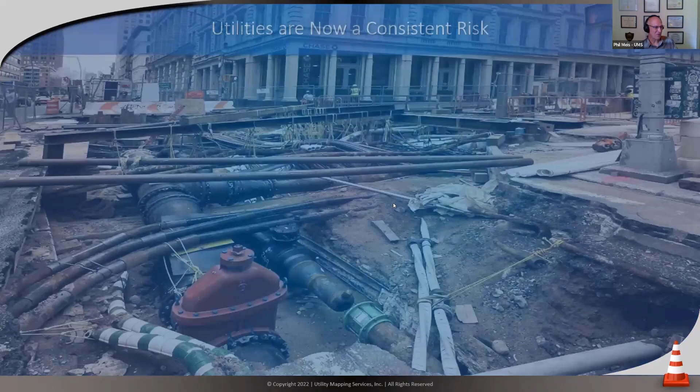Dan will kind of touch a little bit, I think, on some strategic life cycle management strategies that are being implemented at Montana, Texas, and in Iowa right now. We're working with Iowa DOT on a project to basically outline what they need to do in the DOT. So again, there's a lot of parallel efforts going on here. I'm going to just roll down here because we know about the problems.

So we've got these two standards here that we'll cover. And again, this standard 38, and actually we just got a cover - this isn't how the cover is going to look, that was actually from the old cover. We got the new one drafted, was shot to us on Monday, so I didn't have time to put that in here.

But this standard's for existing utilities, as I mentioned. It basically resolves the issue of poor records in the past. We didn't have standards for records, so some records are very good and some aren't, and it's just you don't know what you're going to get, and a lot of times there's a mix out there.

So this kind of addresses that problem, and then this is to kind of get things straightened out. Now, interestingly, this standard ASCE 75 stemmed from the Canadian standard CSA S250, and we had 3 members from the Canadian standard committee on our committee to help us develop this standard. They've since taken our drafts, and I think there's going to be kind of a merging of the two, but we started with theirs. One of the things they said was, hey, we wish we would have made it 3D, we wish we would have made it digital, and we wish we would have included the above ground infrastructure as well as the underground. So that's what we did in ASCE 75 to make sure it addressed all that.

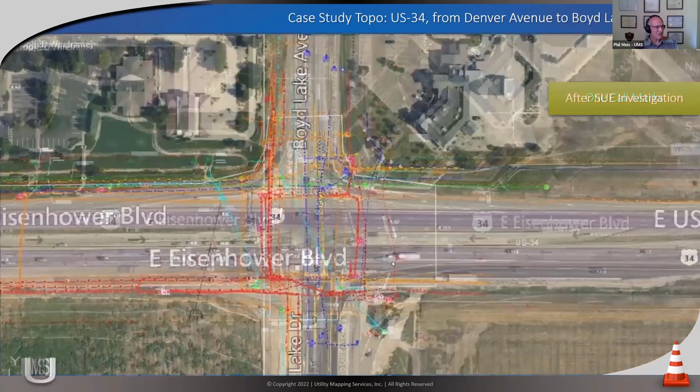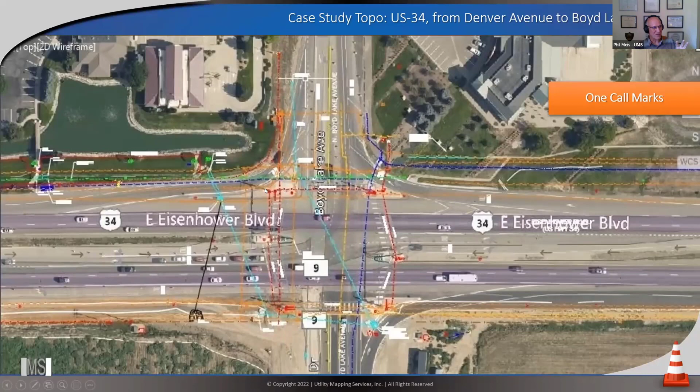I didn't want to stick on that—I wanted to show you some examples of 38. Here's one from Colorado. Before, this would've been a typical records compilation, topo survey, and information going to design. This is after a 38 investigation.

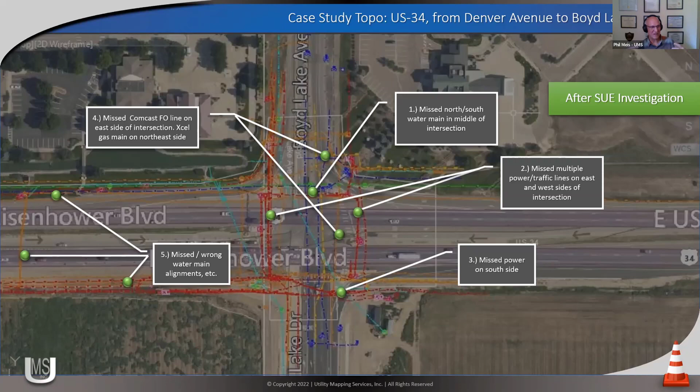There's a lot of things involved—we've got a lot of examples of that. It's a much more lengthy process to develop, but it's the old 'measure twice, cut once' thing. If we spend a lot of time getting the data right, in a standardized format, using a lot of different tools and some of these modern technologies...

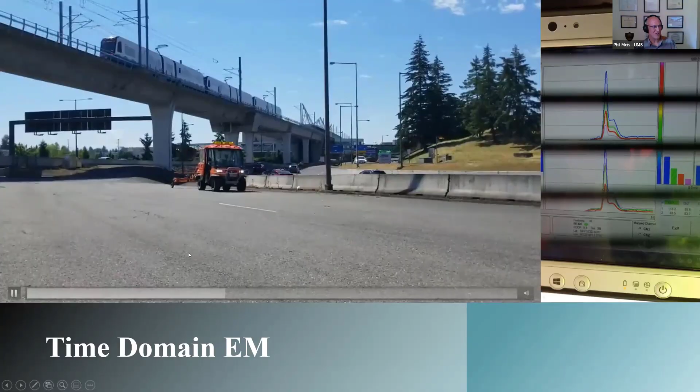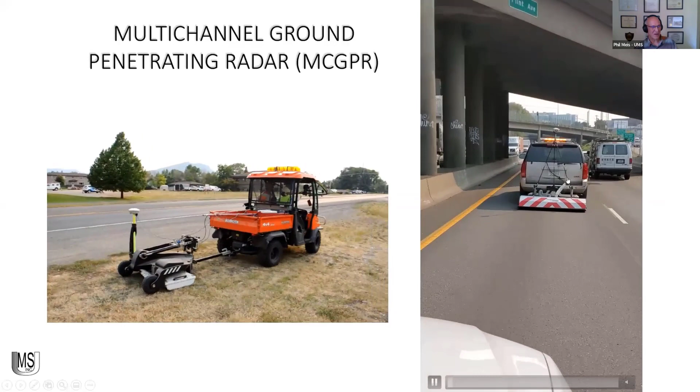This is time domain EM—just showing some examples of the data. Again, I can't dwell on it here. Multi-channel radar systems are coming out too—this is state-of-the-art stuff. We can drive at road speeds and get tremendous scans of the data and the subgrade.

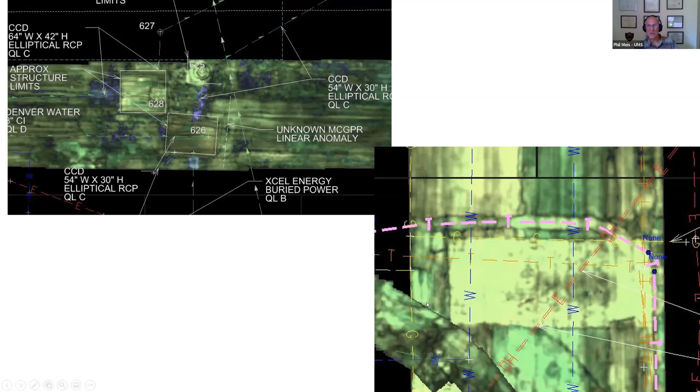These are all just tools we use to stitch this disparate data together, along with professional judgment, analytics, and understanding how these infrastructure systems are designed and built, and the history of how areas evolved and where things are abandoned—bringing all this information together to develop a 3D model that can be used with confidence for design work, like what WSB did on the project Bart mentioned.

This is showing some of the multi-channel radar stuff. Again, these are just tools—they work well in some scenarios, won't see everything, but they do see other things. What we're finding with these tools is a lot of stuff that people didn't even know was out there.

Phil, can I ask you a quick question? I'm seeing symbology here—is there some standard for symbology?

Symbology? Yeah, for instance you've got solid lines and dashed lines and lines with dots in the middle of them. And this one? Yeah, I mean it's kind of all over the place. These are typically what we're seeing here are CAD standards.

This would be Colorado CDOT CAD standards. Hey Phil, I can touch on that too. Yeah, you're exactly right, it's all over the place. But a lot of the DOTs have their own CAD standards and they require it to be a certain way, so it changes from DOT to different agencies we're working with. But yeah, I would tend to agree with you 100% that it's all over the place. But they know their symbology, so for us to change it on them wouldn't go over too well. But yeah, it's a good point.

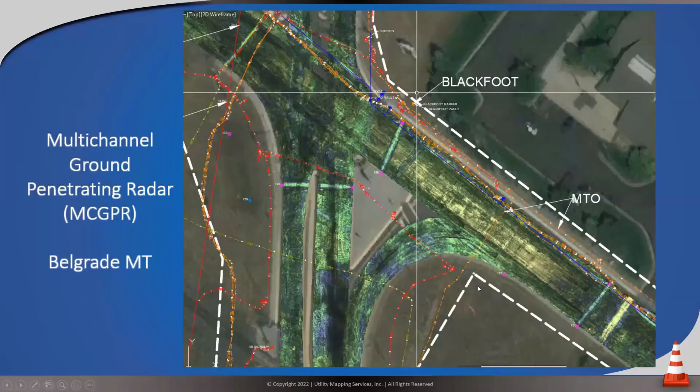And there is an effort as we move into 3D. I think you're going to see us departing from this 2D world and going into 3D very soon, or it's happening right now. There's an effort right now—I think there's a research project funded for NCHRP, isn't it Dan—looking at how to depict these things in a standard way in 3D. Yeah, it's going to be a lot more visually appealing, let me put it that way.

Okay, thank you, I appreciate that. So that kind of helps us—we're working through the same issue right now on how to depict the difference between a locate and a line that has been submitted by a utility.

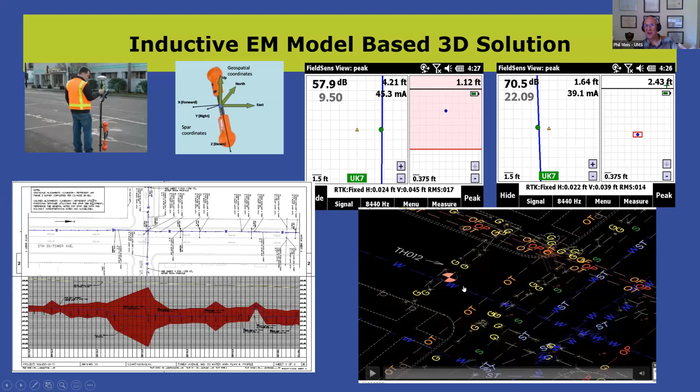So, okay, thank you. Yeah, I think the way ASCE manages it, it's in the data behind the depiction. So you can manage that in a lot of different ways. You can have it embedded so that when you hover over the line, that information's available. That's how you assess how good it is and where it came from, all that. So that's very important to understand when you're looking at it. But you don't want to clutter up your drawing either when you're doing design work, so text leaders aren't a good way.

I'm sorry, one last thing—what was the name of the entity that's working on trying to come up with some standards? I'll have to look into that and find out. I want to say it was an NCHRP research effort. I could ask, I'll check with Jim Anspach, I talked to him earlier. All right, thank you very much.

You bet. So let's, I mean, ASCE 38, by the way, I'm just going to go back here and just touch on it. What we're doing is we're collecting so much different data now that we have to manage it in a more data-centric environment and stitch it together to create something that's consumable for the design effort. And then also beyond that, for augmented reality, for machine guidance, for BIM—there's just a lot of different uses.

But what we're doing is we're managing all the data behind it, like I was saying. So it's not just the CAD file, it's more of a data-centric approach, and it's got to be staged in a way where it's treated like a work in progress, because you're going to get more data as you go along and things change. You're going to have test hole results, you're going to have excavations that expose things, you're going to have old records that show up and new installations that are put in. It's always changing, so you need to have it in an environment you can manage, and then produce CAD.

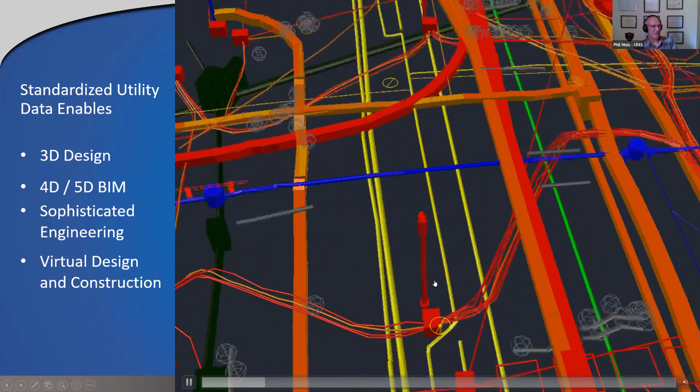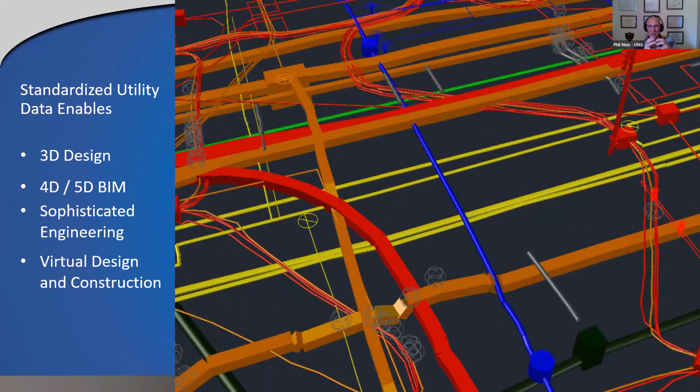But there's your 3D depictions here, and what we're doing right now is every point along here that was used to develop this is based on 2D information from one source and a third dimension that might be from electromagnetics or radar, or it might be an as-built, or it might be a test hole. So we're managing those different data sets, merging them together to make this what you're seeing here. This is what we use to do the design, to do the BIM, and a picture tells a thousand words.

This is where the 3D is so much more appealing than the 2D, because you can understand it. One of the things ASCE 38-22 requires is not only the alignment of it and how you got it, but the space that this thing is occupying. So if you have a vault, if you have different sized pipes, you want to represent the full geometry in 3D and have that as part of your data set.

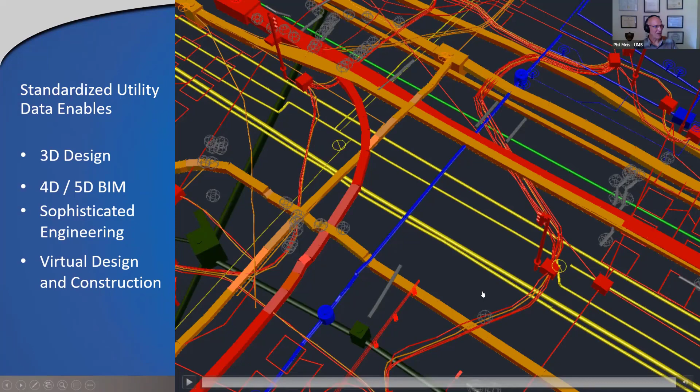Let's see, I'm rushing through here. This is just showing some of the value.

I think I've shown this before, but the value you can achieve by having this kind of information going into the project is significant. If the designers have this information, construction goes a lot faster and a lot safer, and it doesn't supersede the damage prevention effort. That still has to happen, but the design has already been set up to mitigate the risk, so we know where we're going to be tight and where we have to be careful ahead of time.

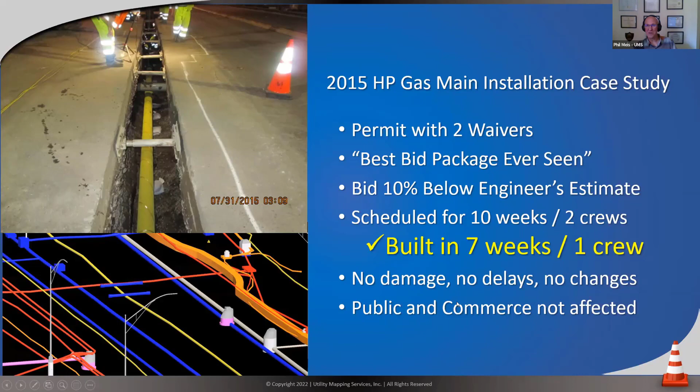The big kicker behind these processes is what we call critical path analytics. If we can reduce the critical path for the project and deliver it faster and safer, that's where your pay dirt is. That pays for all the effort up front. The example WSB has done really brings that out. That was one of our examples from 6-7 years ago, I guess.

So when we get to ASCE 38, there's a lot of things that are the same. We still have the 4 quality levels. We still have engineering tasks that have to be done, value studies - that's been moved to the appendix. The geophysical methods are still present.

But what's different? Well, it's got performance goals now. There's a lot of commentary in there to help clarify the usage of the standard, because a lot of people are taking records and calling it quality level D and saying, hey, we met the standards. Well, no - so there's been a lot of clarifications of misinterpretations. The goal of ASCE 38 is to try to get everything to at least level B, and then A where you need it. B is, rule of thumb, going to be about that kind of accurate.

You can't say it's accurate because you're using remote sensing methods. It's not like survey where you can directly shoot it and get a survey shot - you're using geophysical methods to develop an interpretation of what's there and where it is. So there's a lot of professional judgment that goes into the depiction. We just can't get the data to produce a statistical accuracy like you can with survey, but you can have accuracy for the survey shot that's done on the paint, and that's called out in here.

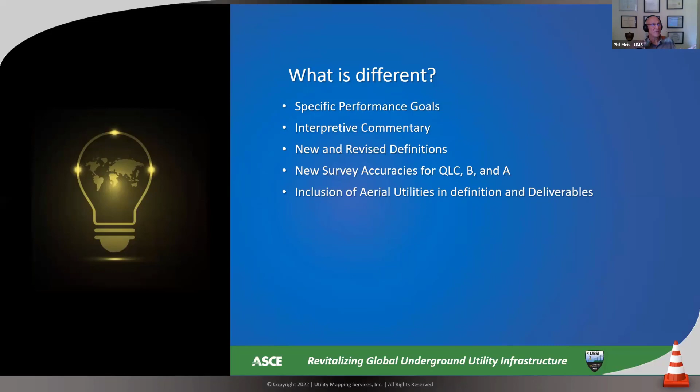And then we include aerial, so it's no longer a standard guideline for the collection and depiction of subsurface utility data, but a standard guideline for the investigation and documentation of existing utilities. That's the new title on it. So it includes both above ground and underground.

Another thing about 38 is, like I mentioned, you want to get the geometry. It's not just a manhole lid - you want to know the space that whole structure is occupying under the ground. So you're going to want to go down and use LiDAR methods or other methods to document that and get that represented.

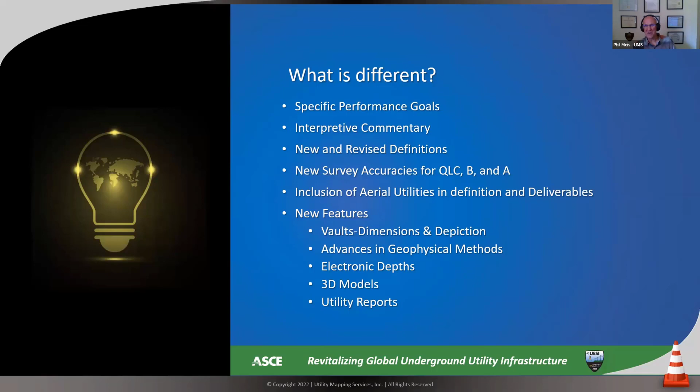They also talk about the advanced geophysical methods I just showed earlier, electronic depths, how to use that. 38 originally stayed away from depth data because that was back 20 years ago - it was pretty much guesswork using electronics. Now you get metadata that looks at the circularity of that magnetic field, and it can tell you if you've got a good circular field or if it's being distorted, and how well you can trust that information. So that metadata is being recorded now, and electronic depths are actually much better.

It's a prescriptive standard and a performance standard. I think that's a big deal for the professional - that was to help get the wannabes out there who are doing different things and not getting the idea that there's a lot of liability associated with it. You want the statutes that regulate professional engineering to kick in for this product - this is an engineering product. That professional has to have a quality management program and a lot of documentation to back up that you did what you said you were going to do, because you could wind up in a court of law if something happens.

No additional information is prudent. Doing the critical path analytics is important, as I mentioned. You want to try to come up with projects that are constructible before you even let the job. A lot of times we can avoid things in design and come up with more sophisticated solutions rather than just relocating the utilities, which is probably the lowest tech solution - moving that utility out of the way.

It's like, well, you can't do that, especially in urban environments. Where are you going to put it? When are you going to put it? How much delay is it going to have? You can't shut that gas line down - then how are they going to maintain their services? If we know where the stuff is, and we know what it is, and we have a lot more information about it in 3D, we can actually come up with designs that protect it in place quite often.

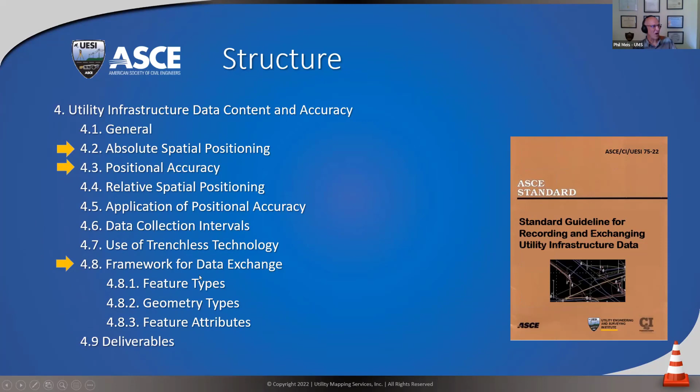At the end of the day, I can't focus on much, but I'm just going to stick to some key things you can walk away with. One is we wanted to use a common spatial datum, so we're using our national spatial referencing system. Everything you collect needs to be tied to that. I came from NOAA 30 years ago, and we were doing this for nautical charts. Most federal agencies, all the DoD activities, are all tied to the National Spatial Referencing System. That's what happens when you turn on your GPS or GNSS system, you're tied into that. So it's easy to achieve.

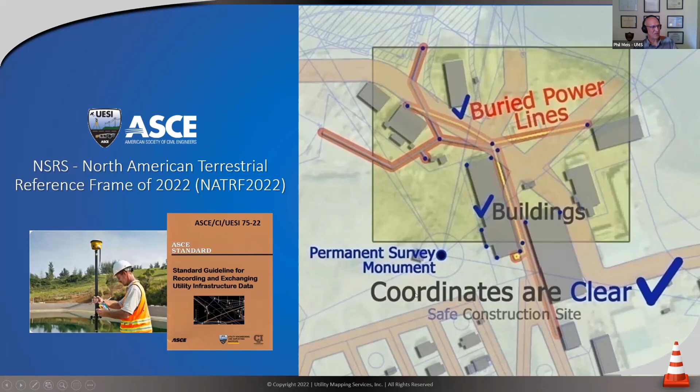Instead of an accurate or quality level, we have an accuracy level. This parallels the Canadian CSA S250 standard—there's a slight difference between their table and ours, but basically it's the same. So when an agency issues a permit to a utility, they say, we want you to document this using accuracy level 3 for this area, we think that's good enough. They might say level 3 for horizontal and 4 for vertical, or maybe 5, whatever.

It's a very scalable standard. You can tighten it up to where you have a certificate of survey, or it can be as loose as using your phone to get GPS coordinates, and we'll qualify it. That data will be qualified so going forward it'll all be standardized in a consistent format we can bring into design, so we don't have all these different formats all over the place. We'll also have the metadata, so we know how good that data is.

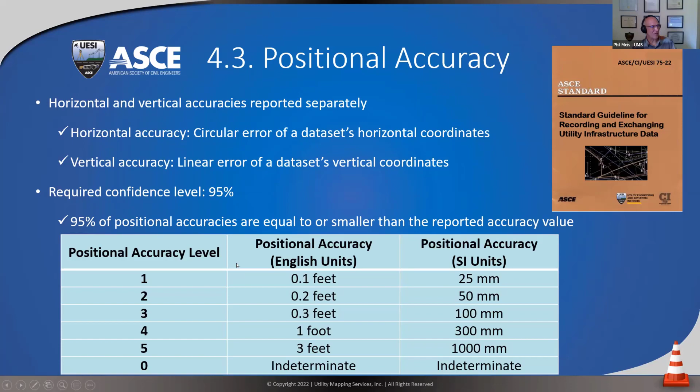The standard was set up to be scalable. If you had to deviate—say you're doing accuracy level 3 and couldn't achieve it—it degrades to level 0 or whatever. It's all there; this is just a general rule of thumb to achieve accuracy level 2 or 3. It's not that hard, again, with the technologies out there, like LiDAR and drilling tips on HDD. HDD is handled a little differently—you can get accurate shots at the test pits and bore pits, but in between, you fall back to ASCE 38.

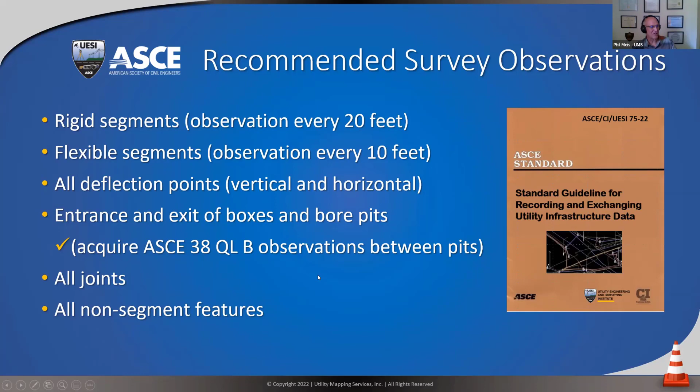These two standards, ASCE 38 and 75, are parallel, sister standards. 75 was written to accommodate the 38 data. You may not get all the data fields populated, but all the 38 information can flow into a 75 format and be shared accordingly. But for directional drilling and remote sensing—using inertial navigation or electromagnetic methods to get that bore tip—that's considered quality level B data. It would still be managed the same way, but qualified as level B, so it won't have an accuracy level, or if it does, it'll be indeterminate.

That's changing too, because as the technology gets better, we can actually start saying it's that accurate. The other thing is the data gets reduced to the center of the geometry you're managing. So if all your shots are on the top center of the pipe, what gets reduced and shared is that center line for the feature.

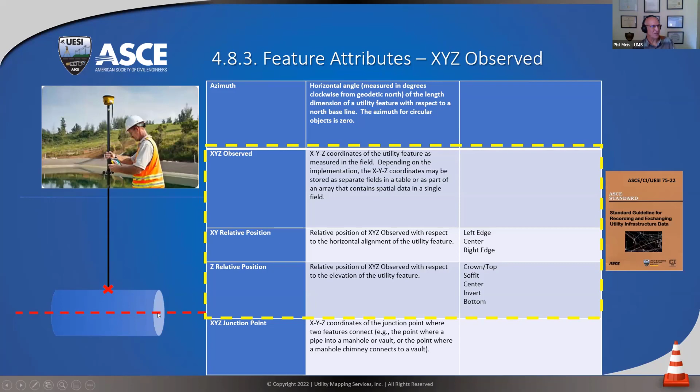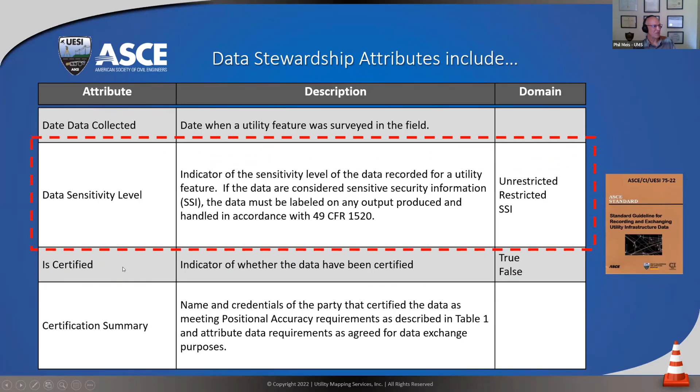We also address data sensitivity—we fall back and use 49 CFR 1520, which outlines very well how to manage sensitive, secure information. There's also certification, but I'm not going to touch on this. This just covers some of the required, mandatory, minimum, optional, and conditional attributes, and there are tables behind this, so it's easy.

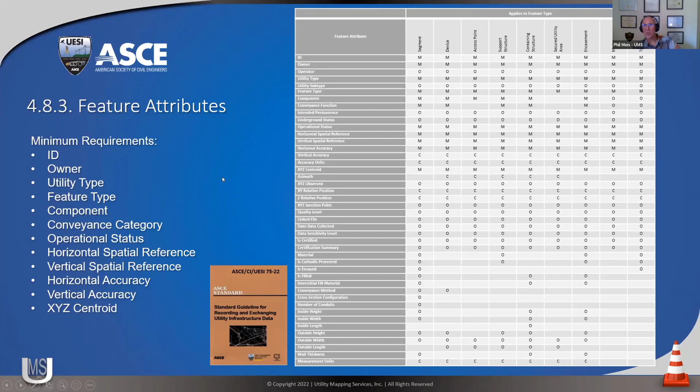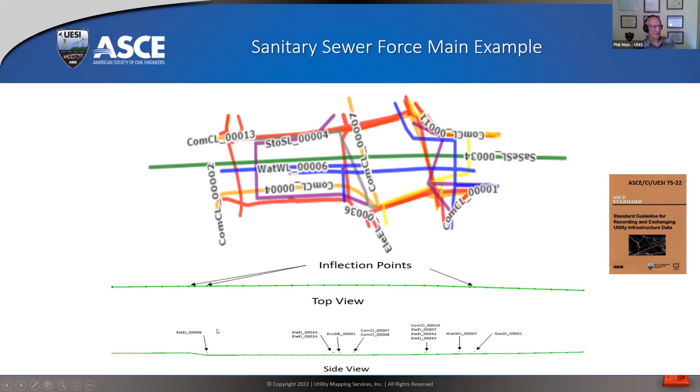This is just a quick example using a sewer pipe. One thing the standard recommends, when it's being administered, is not only get shots on the facility being installed, but anything crossing it—go ahead and get shots on that too and submit it. We may not know what it is, but it doesn't get any better than that. If you've got something exposed that's crossing, get a shot on it and submit it, and that information will be managed going forward.

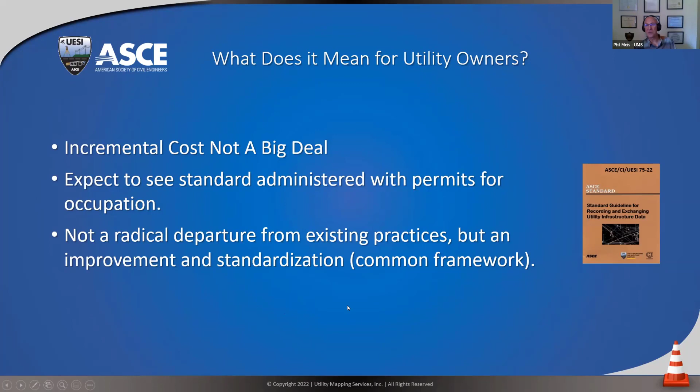Again, we want to enable augmented reality—not a big deal cost-wise. This standard has already been implemented in Montana for new infrastructure for two years now, with all their utility permits going in the DOT right-of-way. The reception's been fine, it's been good—the utilities get it, they love it. We were actually able to implement a very good, friendly permitting system with it.

The benefits achieved greatly dwarf the cost. One benefit: whenever utilities do a pipeline job or new install, they have to go through the same process as DOT does with design, so they get to start sharing and having that information ahead of time.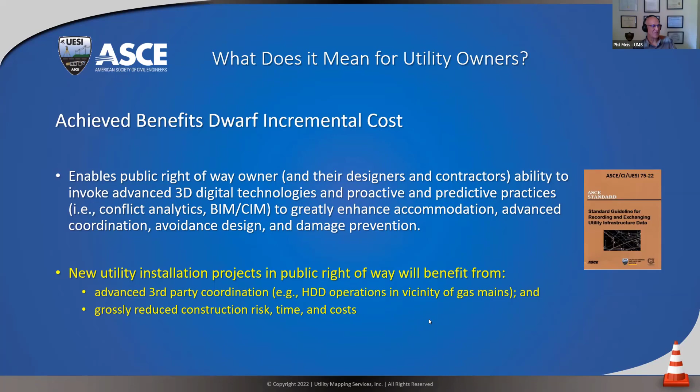That's what Montana's doing, so I think I'm done here. I'm going to stop—this is probably a good transition point. As I mentioned, the OGC MUDDI standard has adopted both 38 and 75 as input, so that's an important thing to keep a finger on.

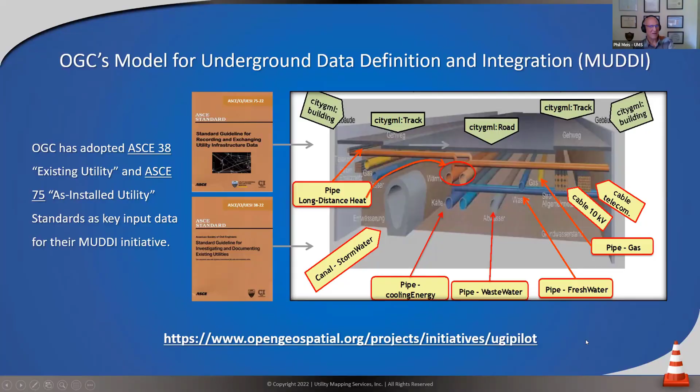So I don't know how I did on time. Yeah, I was going to ask that—how much time do we have? If we don't have a whole lot of time, I can just kind of iterate on things instead.

Could you just go back to that slide 55 with the return on investment? Yeah, you bet, just real quick. And then we've got some more time.

Okay, let me see here. This is kind of an old report. There have been about 5 historic reports done over the years to document this. I think this Purdue study is the one that's quoted the most for using ASCE 38, and this is a return on investment for using ASCE 38.

There's an NCHRP report published last year. We worked with Iowa State and Roy Sturgill, and extended from what the return on investment was from 38 investigations to what ASCE 75 data would bring about. This is pretty conservative - I think it's actually more than this, but 10 times the return on investment for SUE. So we know there's a positive return on investment for using ASCE 38, and if you start using 75 to document when stuff goes in the ground, it's roughly 10 times that. So that's a no-brainer.

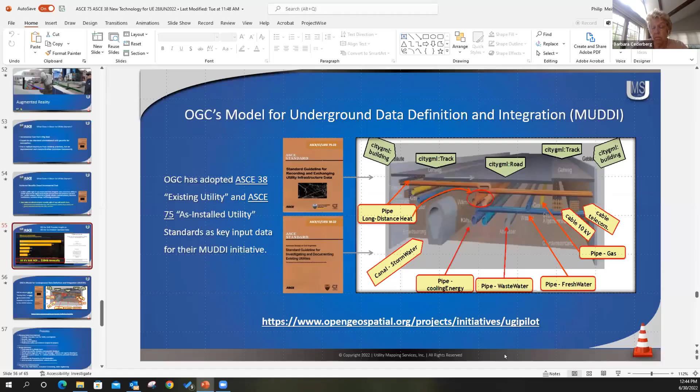Thank you. You bet. So Phil, I can go ahead and just run through. Do you want me to jump down to the slides down here? Hey Phil, while you're doing that, quick question for you.

Could you talk to the issue of the availability of these documents? They're going to be issued at the end of July, is that correct? Yeah, July 25th, just prior to the Pipelines Conference in Indianapolis, the standards will be published. And the question I would have is, to what extent are they available to the public in general - do you have to be a member of such and such? I think you get a little discount if you're a member of ASCE, but no, they're publicly available, anybody can get their hands on it.

So what's the price? I think that was being discussed - I heard numbers like $70 or something like that. Okay, so it isn't - I've seen some instances like the SAE standards where you're paying $600-800 before you have your hands on it, so it might not be a big deal. I think they're talking about actually doing a package deal, you get the 38 and 75 together, and then you get a webinar with it too.

You bet. Dan, did you want me to touch on this?

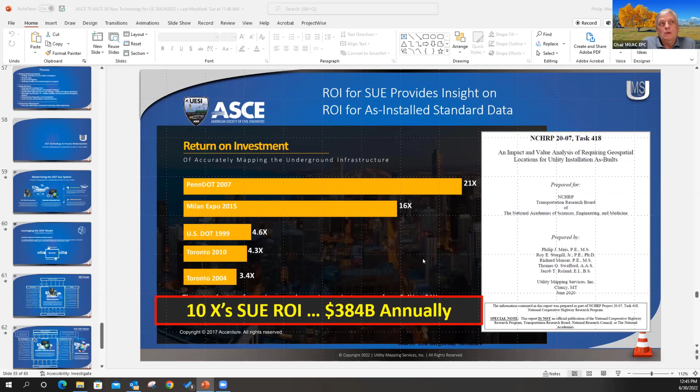Yeah, depending on time, I can walk through with the group what we're doing with the DOTs, and especially how those standards are being applied, so we can put the pieces of the puzzle together. Within the DOTs, we're dealing with their permitting application side, and Phil kind of touched on that. But we're also dealing with the DOT utility data repository - this is where we're capturing all the information, as utilities apply for a permit to put their lines in the right of way. In some states like Colorado and others, but right now we're working with Montana, Texas, and Iowa.

Phil mentioned it's an opportune time to start capturing some of this ASCE 75 data, because number one, they have the design plans they're getting ready to submit to get approval for a permit to put their facilities in the right of way. Secondly, when they do install those pipelines, they can actually capture the ASCE 75 data and get that information directly into the utility repository.

The stakeholder collaboration portal allows the ability for utility members and other stakeholders - could be 811, the one call, other state agencies - to be able to collaborate and share data, but where all the data sits in their system of record. There's a lot of sensitivity around utility data, as we probably all know, so a lot of times they don't want to replicate that data or even submit it to the DOT repository, but they will share it through a collaboration portal for a project purpose, to minimize risk to their facilities. So you can go ahead and flip through this really quickly.

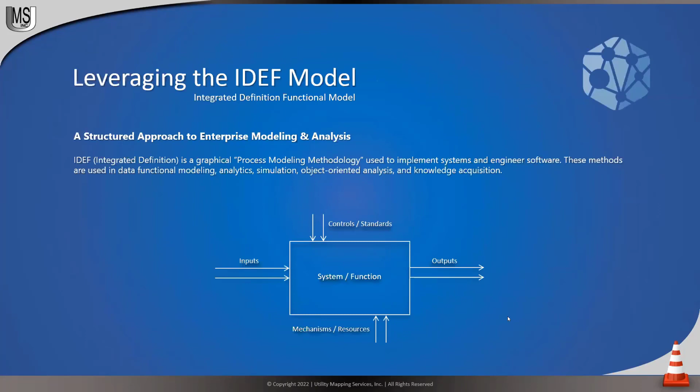You can probably skip through this slide. Go ahead and click through to where everything shows up on the screen. So what you see here is a structure. Oh, go back one more. Yeah, it's easy to do.

You'll see up top these standards that are being implemented. You'll see the OGC MUDDI, and also ASCE 38 and 75. As Phil mentioned, those two standards complement one another. OGC MUDDI is the committee that I'm on, and I'm also on 75 as well.

The point is so that we can pull this data in a standardized way to generate a 3D digital twin and capture that information in the repository so everybody can share things. Right now we have a lot of information coming in from a lot of different people. At the bottom you'll see we have data coming in from utilities, a SUE process, engineering, 811, traditional survey, construction, permitting. There's a lot of data - these are just examples of mechanisms bringing data in.

On the left there are examples of data inputs coming in. Phil mentioned some, like GPR, geophysical data, but there's also 811 ticket and locate data, permit data, as-built data. The list goes on, and this is just a sampling of the type of data that comes in. So we're dealing with a lot of information, a lot of different formats, and in some cases different projections that aren't standardized in one particular way.

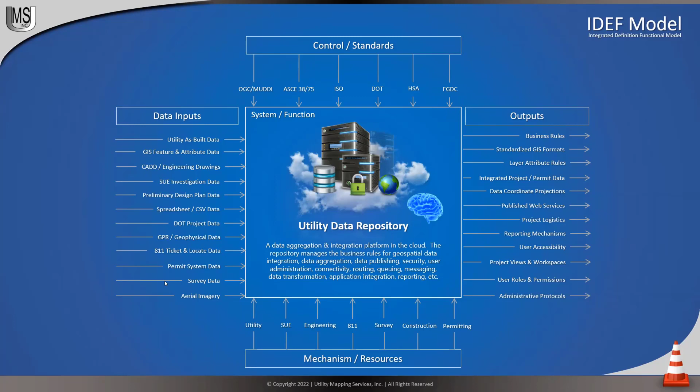Those outputs come in and become the inputs for this collaboration portal I was talking about. We still have all these standards being applied, and there can be other standards too - these are just examples. But where we really get into it is with OGC - all the major applications from Autodesk, Bentley, Esri, from the GIS, they all can communicate today. They couldn't do that four or five years ago in some cases, and some of these newer standards like MUDDI are just out.

Now it allows people to do a bi-directional sync with this. Stakeholders like utilities can share their sensitive data securely. What the MUDDI initiative has really done is take the two worlds between CAD and GIS that have been separate, and merged them together so you can create a standard where all these OGC-compliant applications - which all the major ones are - can read and write those standards.

Now you can share directly from GIS to CAD without doing a major data conversion. This is extremely important because there's been a lot of loss of data between those conversions. By having it in a standard, and being able to adopt ASCE 75 and those standards, it allows this web services integration to happen and allows sharing of information between different entities. I know I went through that really quickly.

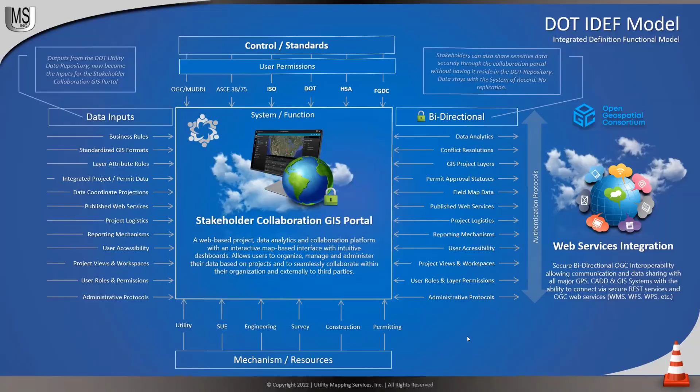It's like drinking water through a fire hose, but this is an example of a collaboration portal, and this data can be shared. So let's say utility A wants to only share it with the DOT and no one else - there might be other stakeholders of that project, but their permissions, roles, and settings can be restricted. But there are scenarios where they do want to share data directly with another utility, because they want to make sure they can work together to minimize the risk of, say, their fiber optic line being hit. They can share it, but they remain the system of record.

One good example I like to use is that we also have weather that can stream in as well. Weather comes from NOAA, and we're not replicating that data, but streaming it in live - it's dynamic information. We don't manage that data; it's managed at a system of record at another system. Utilities have their own GIS systems and their own data.

They're collecting a lot of really good information, especially during the as-built construction time, but it's data that we don't normally see outside the utility. But now working with those utilities in Iowa, there's a huge effort going on where we have all of the utilities within the entire state that are part of this stakeholder initiative to start collaborating and sharing their data.

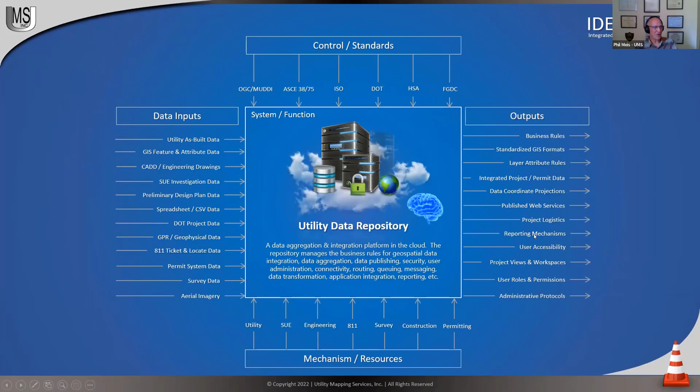How does LiDAR fit into all that? Oh, yeah, Bill probably can. Well, yeah, so LiDAR is just another survey tool, basically.

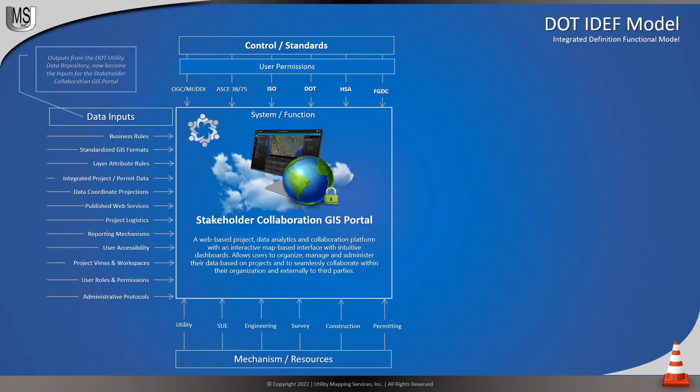With the aerial LiDAR, the downhole LiDAR, mobile LiDAR, everything's geo-referenced. You get thousands of very accurate points out there, these clouds of data. The only trick is you have to be able to manage that rather dense, large data set. You talk about terabytes of information, and you need to mine it and reduce it to something that's consumable for data management.

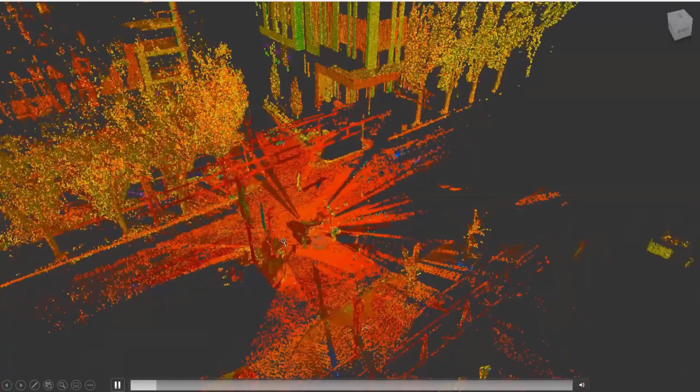Yeah, another good example is that in this collaboration effort, a lot of times that LiDAR data will capture information that maybe even the utility owner was unaware of. And so having that data within this process, within the collaboration side, has been extremely useful in working with the utilities too, to understand that there's other data they can use to rectify their own records. But that's just one tool in the toolbox, right?

But yeah, where we're plugging it in is for that criteria in ASCE 38, where we need to understand the spatial occupation of those structures and vaults under the ground. It's a wonderful tool for logging it.

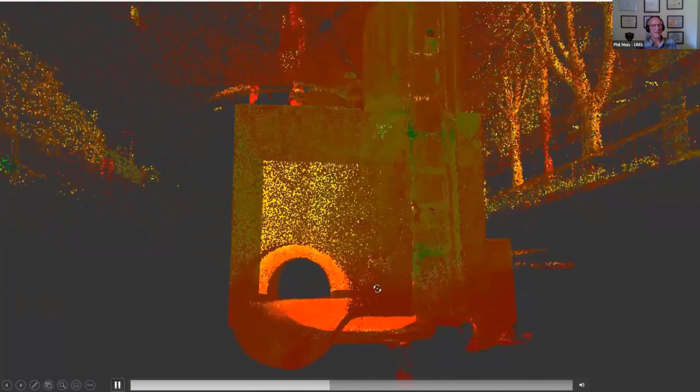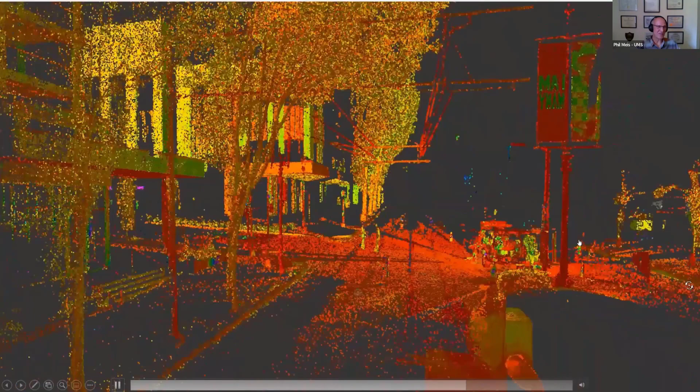The other thing is, we have a limited time where we get into the street, we can drop this thing down, scan the whole thing, get all the pipes and all the dimensions and all the inverts, and everything's there. We don't have to go back to it. So it really helps us from a data collection process. And then the above ground stuff is wonderful too, because you can get where it all attaches. LiDAR is a huge tool that will become more mainstream with all projects.

So Phil, I have a question for you, if I could. Yeah. Can you talk to the issue of depth? We've more or less in our thinking about data flow dismissed depth as being an issue related to the potential for earth movement on top to functionally change depth. So how did you guys tackle that?

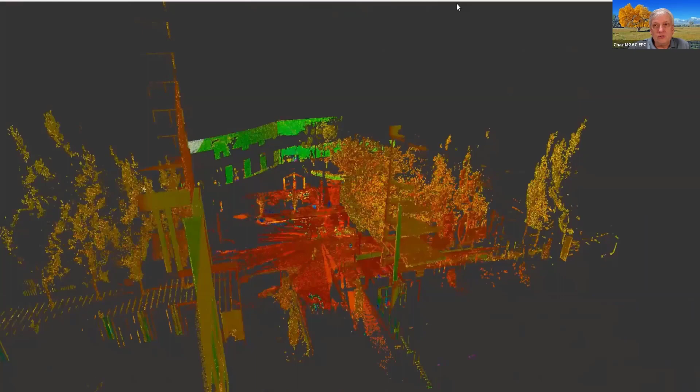Depth for SUE investigations or depth for as-built? Well, it seemed to me that across the spectrum, you were reporting depth based to the center line of the item. And so as a NOAA guy, I'm guessing you're going to tell me AGL, or I should say above mean sea level is really what I should say. I see, yeah, exactly.

So for 75, the depth would be your orthometric height. It's basically perpendicular to the gravity field at that point. So instead of, our national, we're using NAVD 88 right now to tie it to that.

That makes sense. Are you a surveyor? Do you have, is that, who am I talking, Steve? Is that you? Yeah, I apologize.

No, I was just trying to get my brain around the fact that from the locator perspective, and Travis is on the hook here and he can chime in, the issue that as a locator locates something, he's, as I understand it, making a measurement relative to the surface level of the depth of the item. And so I'm just trying to get my brain around the ground surface, the depth below ground. So we're trying to take that one step further. When we collect data for 38 investigations, we're going to survey that paint mark on the ground. And then we have actually several different tools. The depth will be measured.

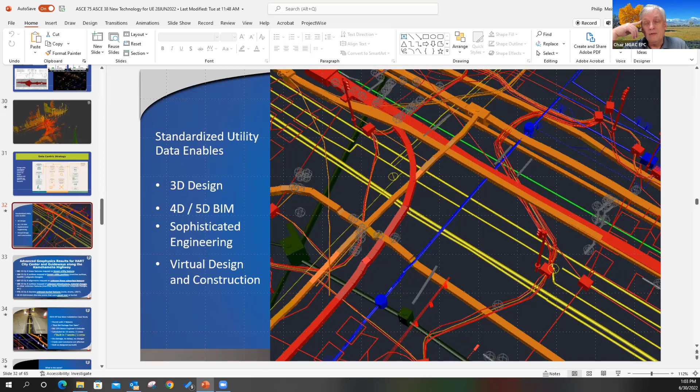I don't know if we probably need to tune in a little more with what you guys are doing. No, this has been very insightful. We thank both of you for coming by and doing this. Just to follow up on Dan's comment, that's exactly why we've steered away from any model that's about collecting data and bringing it in. We're following the same approach you've discussed here, facilitating through WMS and WFS the roll up of data to facilitate delivering it, not drinking water through a fire hose.